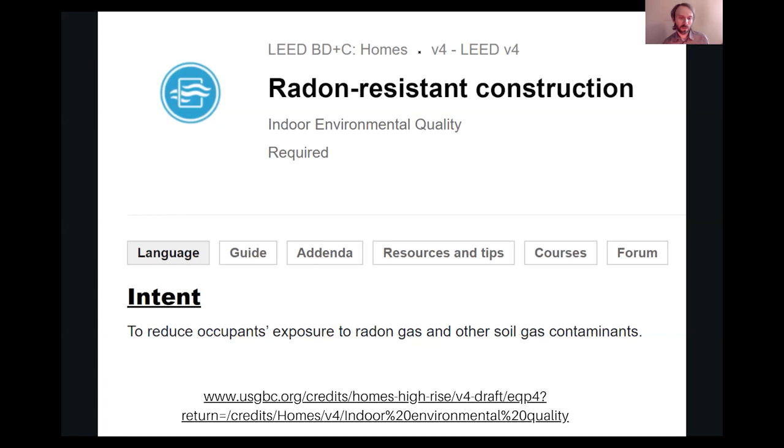Under the LEED for Homes certification program, the residential program, radon is addressed through radon-resistant construction practices. Typically this involves requirements for homes in EPA Radon Zone 1, but you can also get an extra credit if you do this in EPA Radon Zone 2.

So you're talking about capillary breaks, electrical outlets near the venting pipe for passive systems, and having the vertical vent pipe properly installed with the T-fitting in the aggregate layer below.

We're not going to be talking about that today. We have other sessions we've done, and you can check that out as far as how to do these strategies.

Canada also has some requirements here if you're doing a LEED project in Canada that you can take a look at as far as testing procedures.

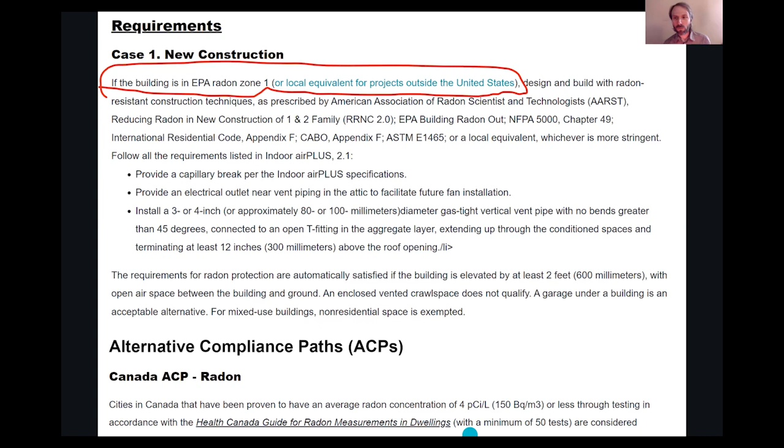Now, for those of you outside of the US, in countries with especially no radon practices, there's a couple different strategies you can take. First of all, the one that we recommend, and we recommend this in the US too, is just assume the worst. Assume a high-risk radon system, install the passive ventilation system, and encourage testing.

If you do not install the system, then we're talking about long-term tests or short-term tests. And again, today we're going to be talking about these long-term tests and the best way to do it, which have added benefits to your clients for radon, right?

Or you can demonstrate that the project is in a radon low zone by having government available data in those other countries. Now, if you're doing a LEED renovation project...

Again, if the building is in an EPA zone 1 with no slab work being done, then you need to test the building for radon. So again, we're going to be talking about that today. What is the best way to test? There's a good, better, best approach.

This is the best way to do it long-term, ensuring that anything changes is handled properly. Again, it's above and beyond the requirements for LEED, but it is something we are going to be highly recommending. This is what needs to be done when you're doing renovations.

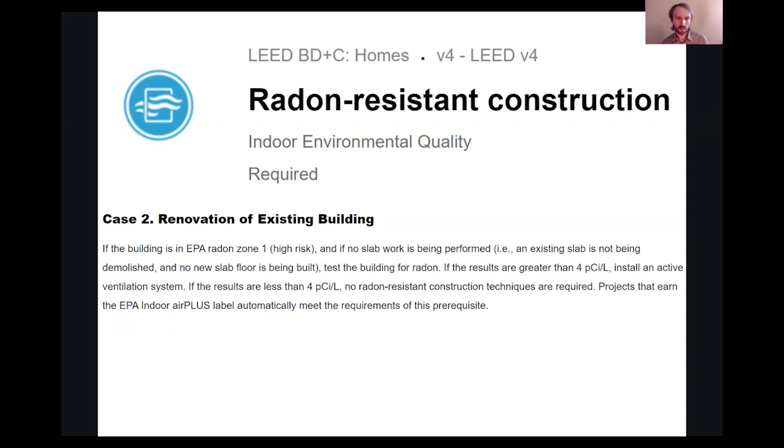Now, for the Green Star certification program, whether new or existing construction, if you're in an EPA radon zone, you do need to put in a mitigation strategy. But all homes, no matter what zone they're in, must do testing. We've been going around testing existing homes, even in radon zone 3s, that come back high off the charts. We saw someone's house come back at 25. Again, 4 is the level where you take action; other countries take action at 2. This person happened to be a nuclear submarine operator, so maybe it was radiating off them, but anyway, I don't know. We see these things come back at higher levels. So the Green Star program requires testing no matter what zone you're in, and there are alternative approaches at the gold level of Green Star requiring ongoing permanent testing, which is what we're going to be talking about today.

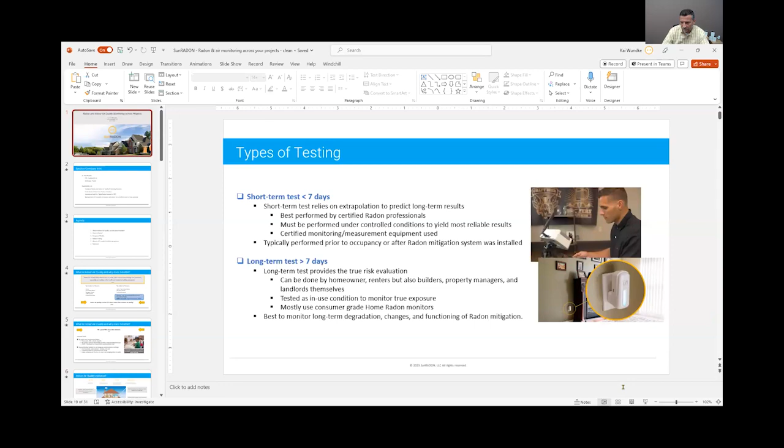As Brett said, the talk today is about radon and air monitoring across projects and what it means. As an introduction, my name is Kai Wundke, I'm the CEO of SunRADON, a Melbourne, Florida-based company, privately owned. We design, manufacture, and service radon and indoor air quality monitors for more than 30 years, since 1985. We serve professional radon testers, home inspectors, consumers, facility managers, property managers, landlords, you name it. We invented the first digital radon monitor in 1987, and since then we've been trying to improve our products and services. We've deployed tens of thousands of units still in the field monitoring, and every year we collect tens, if not hundreds of millions of hours of data which help us make decisions. This presentation is purely based on our experience, what we see and do from a manufacturing perspective to help improve indoor air quality.

Quick agenda for my talk: I know many of you are aware of what indoor air quality means, but I'd like to give a short introduction to bring it into perspective - why it matters and how radon plays into that. I'll repeat what radon actually is, since not everybody knows the dangers of radon, then go into testing strategies and examples of modern IoT-enabled monitoring systems for radon and indoor air quality, with a short summary at the end. If I talk too fast, please let me know. If you have questions, use the chat and ask Laura, and we can have a Q&A session at the end.

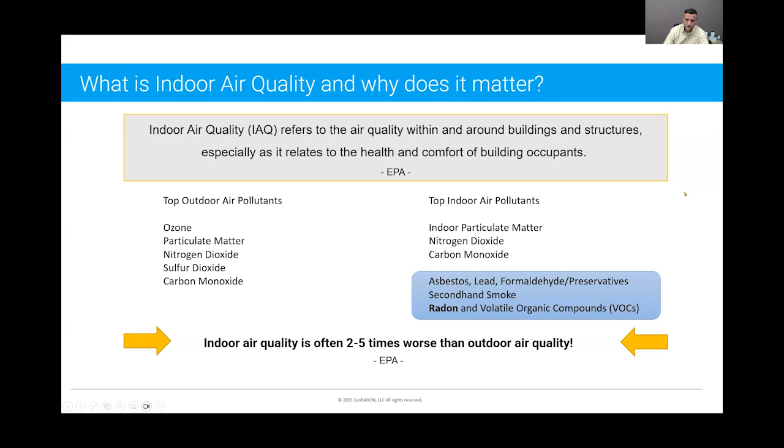Now, when we look at these trends, why indoor air becomes more and more of a concern, and also something to do about this, as time goes on we're spending actually more time indoors. There are a couple of reasons for that. Part of it, of course, we all live at home in our homes, our apartments, but most of our work is indoors. Our offices are indoors, schools, hospitals, education facilities. In many ways, for the most part of our life we're actually moving from one indoor facility to the next one and only spending very limited time outdoors. We all wish we would spend more time outdoors, but we don't.

Because of that, items like the sick building syndrome, probably something that wasn't really a name 10, 20, 30 years ago, becomes increasingly a major occupational hazard. So if you read EPA and CDC guidelines and updates, you find a lot about the sick building syndrome, which is not a particular disease or illness or pollutant, but it's the combination of all these indoor air pollutants which basically make the sick building syndrome.

Now, from our own experience over the last 3 years, we had our COVID-19 pandemic, and work from home policies changed how we work. We work from home much more than we work from our offices, actually. So it becomes more important as we go on that we spend more time indoors.

On the other end, GreenHome Institute and many good organizations around have a lot of good initiatives about improving our building standards. Now, what this really means in many areas is we try to save energy, try to have less pollution outdoors, but also less energy emanation from your house outside. And what this really does is, unfortunately, it prevents natural air exchange.

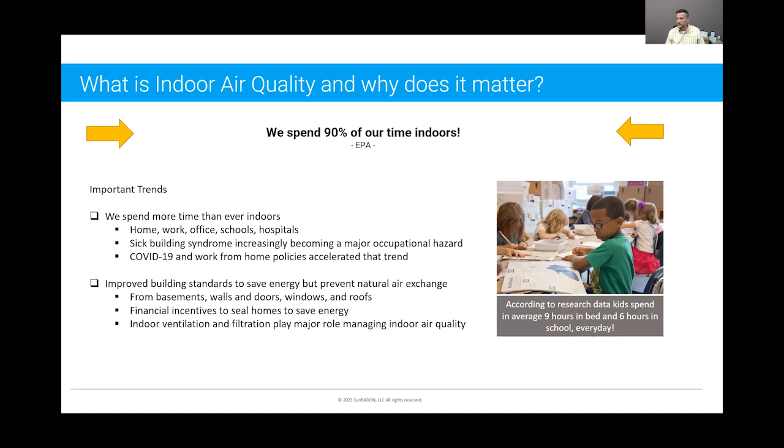And it causes a lot of health issues. It causes health issues for kids like pneumonia, but also cancer, as I will show later.

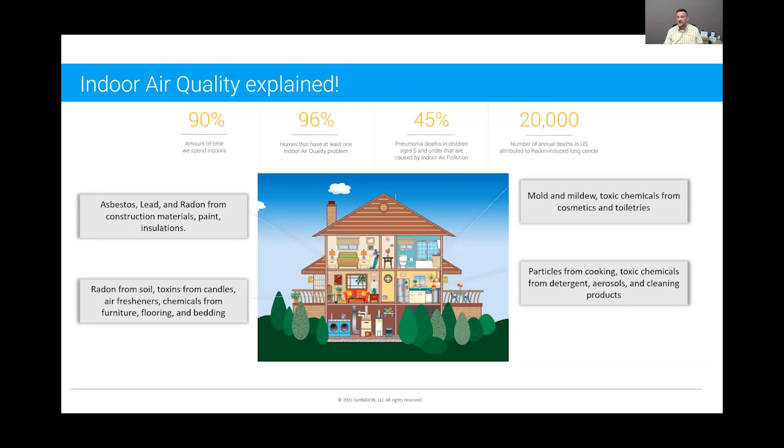So if you look at this really, if you're not careful, you have a lot of materials in the building, in the construction of your house, in the furniture, in what you use every day, in your utilities, in your utensils even, which could cause indoor air quality problems. And that's why it's so important.

Now, good versus bad indoor air, what does it really mean? Well, I talked a lot about you want to prevent illnesses and diseases, such as cancer or anything related to that, but something maybe less obvious: you just want to breathe better, you want to sleep better, you want to have fewer allergies, you want to have more energy. If your indoor air quality is good, these are the benefits, not just preventing diseases.

On the other side, if the indoor air quality is not good, you can start anything from general discomfort. You have a headache, you have dizziness, shortness of breath. The next level up is you get infections, you get skin reactions, you get some poisoning, nausea, vomiting. And the next higher level is then you develop severe diseases, damages to your liver or kidney, to the brain and central nervous system, and up to cancer. Or it can be fatal.

At the same time, the effect of indoor air quality is not just on your health, it's also in our society. If you look at your work, where you go every day, it affects productivity, it affects effectivity. Statistics show that there's higher work absenteeism if the indoor air quality is not controlled in manufacturing and office environments. It reduces cognitive ability, so people are just not functioning as well if indoor air quality is not good.

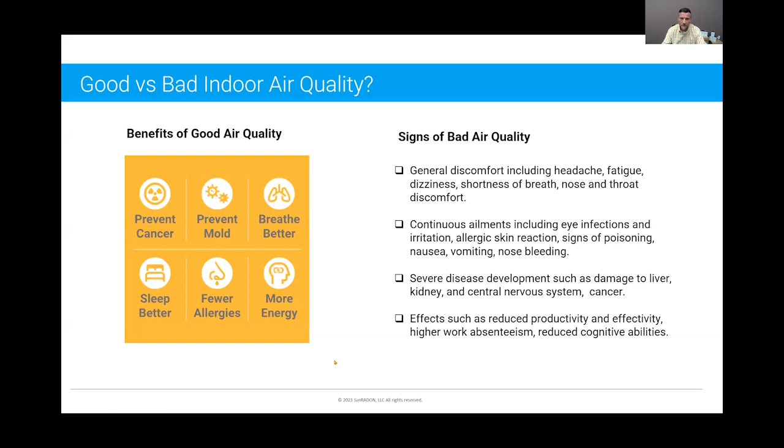Now, my last point about indoor air quality in general is also I want to talk a little bit about the misunderstanding. Why are we where we are, where not everybody is really very well aware of the danger of bad indoor air?

Number one is, typically when you talk about indoor air quality, you're talking about something that doesn't affect your life immediately. It doesn't kill you immediately like carbon monoxide or smoke. We have carbon monoxide detectors in our bedrooms. We have smoke detectors in our kitchens and living rooms. Yet we don't have any other air quality sensors, because it doesn't feel as urgent. There's some sort of complacency.

The next point is that, interesting enough, a lot of indoor air pollutants are actually not easily filtered by your HVAC system. You think you have a good HVAC system, you have a HEPA filter, some advanced filtering, two-stage, you name it. Yet all what your HVAC system actually does is distribute your indoor air pollutants across the entire building. So there's also this false sense of security or safety that you're good. Well, you might not be.

The next point is some of the air pollutants absolutely do not show any early warning signs or side effects. So just because you don't have a headache, you don't sneeze, or you're not kind of flapping around, doesn't mean you don't have a problem. Again, often false negatives give the false impression that there's no problem.

And at the end, it was also not easy to test for all the indoor air pollutants until recently. Just until recently, technology like MEMS, micro electromechanical systems, basically mini chips in one unit which can measure for VOCs, it was just not as easy and available and affordable to test for indoor air quality and indoor air pollutants. It required you to hire somebody very professional, somebody who can do a very specific test for you, a one-time test for a day or two, or whatever it is, gives you a report and you pay for it and you're good.

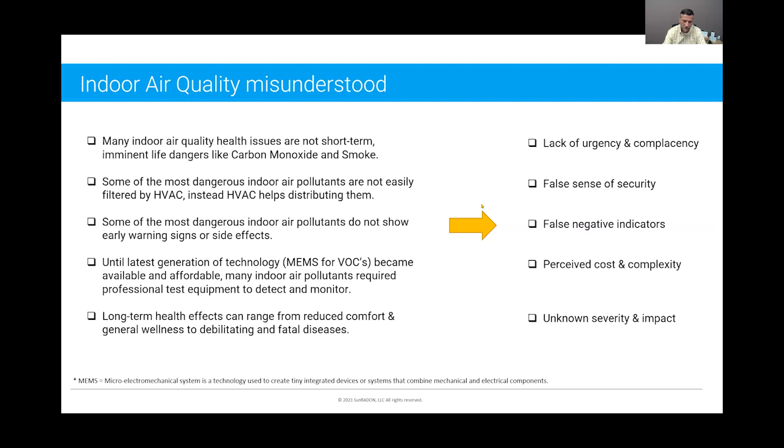Now let's go to radon. Why radon? Obviously, radon is one of the number one indoor air pollutants, and in our eyes, one of the most dangerous indoor air pollutants, and I will explain why. What it is and what it does, I will explain as I go into radon testing.

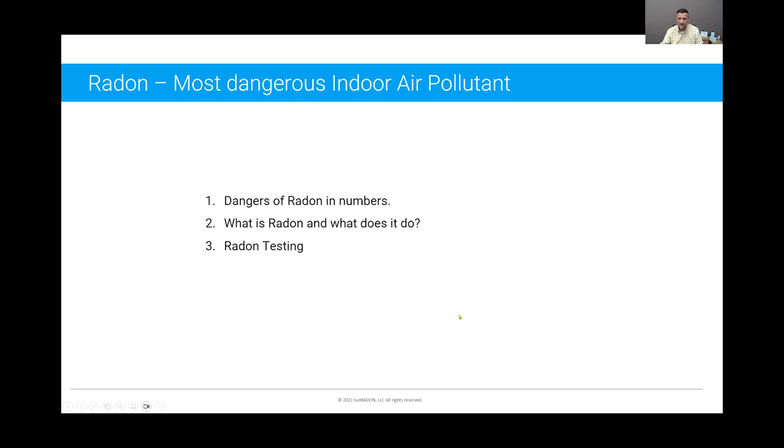Some statistics here you might have seen before: according to the EPA, data from about 10 years ago, so it should be updated, about more than 20,000 people every year die from radon-induced lung cancer. If you make this relative in numbers, it's actually more than drunk driving fatal accidents every year. It's more than all combined indoor home-related accidents and deaths, including fires, drowning, electrocution, falling from a ladder, you name it. Combine all this together, and it's still not the number of radon-induced lung cancer deaths every year in the United States. On the right side, you see some statistics on what the levels mean in terms of smoking.

Also, just to visualize it, about 1 in 15 homes in the United States have elevated levels of radon. So millions of homes, schools, and buildings are affected here.

I also want to make a brief comment on the EPA zones. Brett mentioned EPA zones 1, 2, 3 and requirements. I'd like to put a little bit of a warning out there: these EPA zones are based on maps which are more than 20 years old.

So we, as a manufacturer, are helping the CDC to basically update these maps. We're giving a lot of data to help look at this, but these EPA maps are, A, old, and B, they only talk about known exposure from soil. They don't talk about what can happen based on local infrastructure or construction materials, none of that. So just because you're in EPA zone 1, or not in zone 1, doesn't mean you can feel safe. There are also false conceptions there.

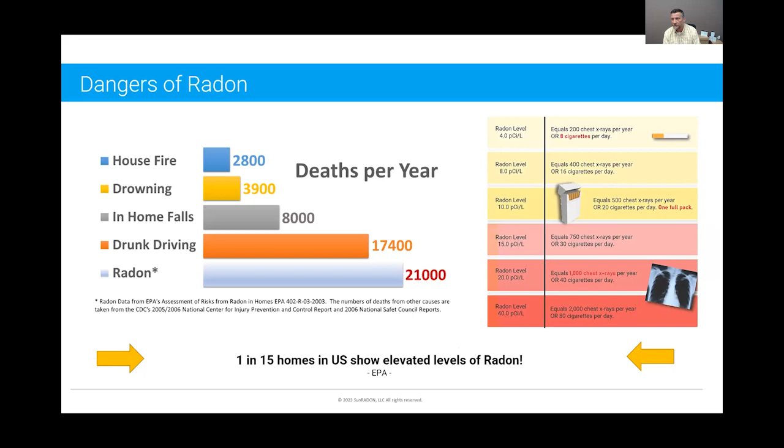Now, what is radon? Well, radon is a naturally occurring radioactive gas. Unfortunately, you cannot see it, you cannot smell it, and it exists everywhere - everywhere there's soil, everywhere there's rock formation. It exists to a different degree, but it exists everywhere.

On the outdoor level in the United States, on average everywhere, it's about 0.4 picocurie per liter. I'll try intentionally not to go into technical details of what this means, but as radon emanates from the soil around all of us every day outdoors, it is there. Everybody breathes it in, but at levels known below 0.5 picocurie per liter, studies show it has no long-term, measurable effect on your health.

Now, radon can originate from soil under your home, but it can also originate from water polluted with radon, or it can come from construction materials - many people forget that. Very simple: if you use sand which is radon-rich, which emanates a lot of radon, and you make concrete out of it, the concrete will emanate radon forever.

Also not very well known is that radon can actually diffuse through a lot of the vapor barriers on concrete material we think might prevent it from entering your home. It might slow it down, but it actually doesn't prevent it. Now, of course, if you have a steel wall, no radon comes through, and if you have a very dense concrete wall of 3 feet, nothing comes through. But often this is not the case.

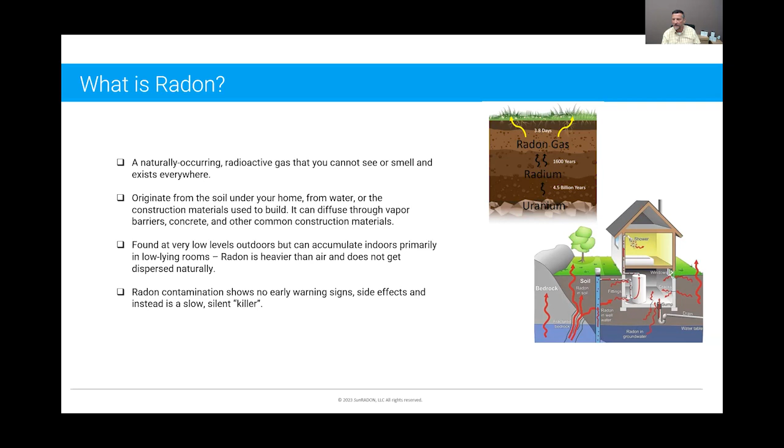Now, radon is actually one of the things where you won't have any warning signs. You won't have any side effects. You won't know that you're actually inhaling radon every day and that it damages your lungs.

And this is my last slide here. The dangers of radon is it gets into your home, as explained. You actually breathe it in, and what happens is you're breathing in the radon and it decays after you breathe it in. Once it decays, the alpha particle, which gets generated as part of this decay process, is actually what damages your lungs. And if you do that long enough, with a high enough concentration, it slowly but surely changes the DNA of your lung, it basically damages your lung irreversibly. And again, 21,000 - and this number probably is higher by now - but it's basically the data we have from the EPA.

Now, radon testing and monitoring. The core of this talk here is, what about the cost? And I have a quick one slide to that. And then type of testing, type of properties, long-term versus short-term testing, the question why is long-term testing important, and then some examples about long-term testing with home monitors.

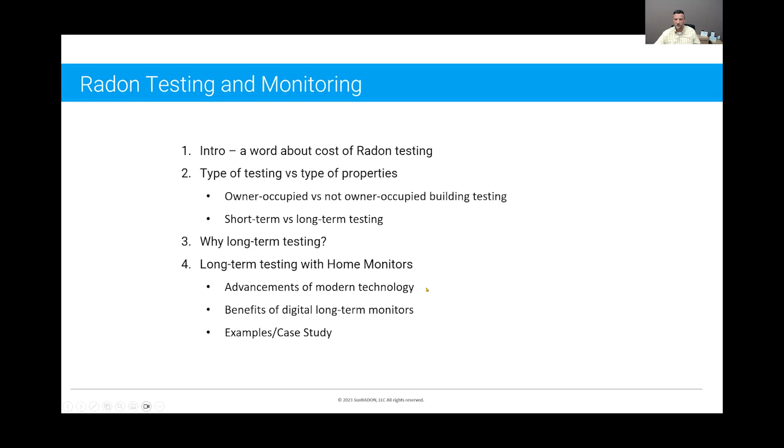Now, to the cost of radon testing. On average, a radon test costs you about $250. And when I say on average, that's about what a radon inspector will charge for one test point when you have a single family home with one foundation. It's about what you pay for a device you can buy by yourself and install. So it's an average, but it's not much more than that. Now, if you want to test multiple homes, multiple floors, it becomes more, but per test it's about $250.

But now, if you get sick, if you get cancer because of radon, well the first thing is you have out-of-pocket expense for the insurance. If you have good insurance, you might pay $4,000 a year. If you have less good insurance, you might pay $30,000 out-of-pocket expenses. But the real cost really is in the tens, hundreds of thousands of dollars every year for cancer treatment. When you look at radiation treatment, blood treatment, it goes up to almost $1 million a year per patient.

Now, I don't even want to try to put a number on what is the cost of life when somebody dies because of cancer, or family members missing someone, someone just dealing with cancer, with the treatment of cancer, with the interruption of life - even if you're a lucky one and you can get treated and completely recover. I don't know how to put a number on that, but it's huge, and you can make your own judgment. If you look at it from an economic standpoint, the economic impact on patients who get cancer every year - in 2019 the CDC estimated it was more than $21 billion. Radon is not just the second leading cause of lung cancer, right behind smoking, it's also well within the top 7 causes of cancer in general, any cancer.

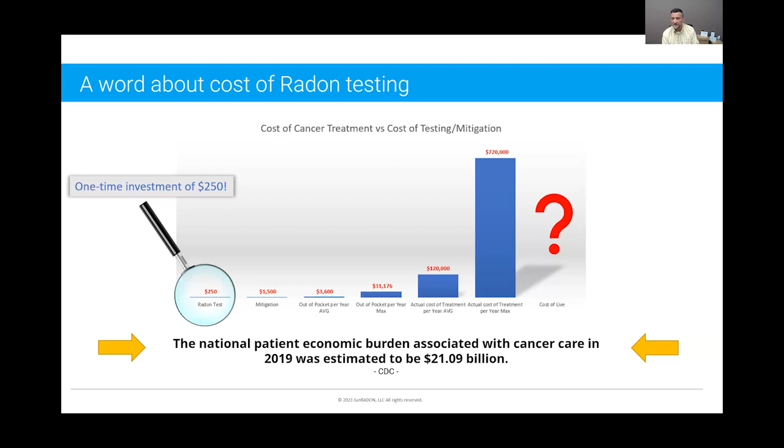Now testing - I came up with this slide myself. You won't find this in any publication, but I try to give a really high-level overview. When we talk about testing, what does it really mean, or what options do we have here? On the left side, you see this quadrant, 4 quadrants, and I try to distinguish between owner-occupied facilities and buildings, and not owner-occupied. What I mean by owner-occupied is all single-family homes, townhomes, owned apartments, condos, something like that - something where you purchase it and you live there. This is what we have in mind when we talk about radon testing. Most people have that in mind: I buy a house, an apartment, a condo where I live, and I want to test it.

However, there's a much larger number of structures available which are not owner-occupied, and we also need to think about it, because we spend time in there too - multifamily buildings, apartment buildings, rentals, office buildings, educational and retirement facilities, your high school, your university, hospitals, commercial, industrial, manufacturing buildings. People spend 8 hours on a manufacturing floor making products for companies like us. It's indoors. We have to be concerned about that.

Now, who are the responsible parties to make sure that these buildings and structures are safe for the occupants, for the people living there? On the not-owner-occupied side of buildings, there are landlords, property managers, facility managers, but then there are the occupants themselves, who are responsible for their own actions, for their own health.

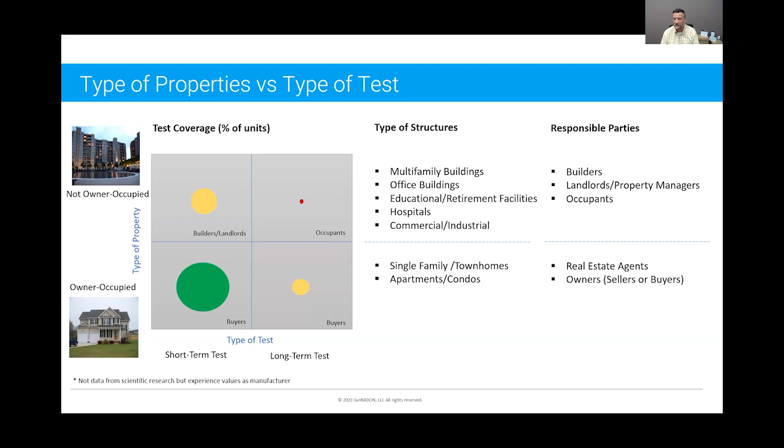Now, from our perspective—what we would like to see based on our experience and the impact on health and what can be done—this is how the map should look like.

There will always be short-term and long-term tests, because there's a practicality to that. In many situations, it's just not practical to test long-term for 30, 60, 90 days, or continuously, 24/7. So short-term testing—there will always be a need for that. And this should have the same need and the same coverage for not owner-occupied or owner-occupied. There shouldn't really be a difference.

But the long-term testing coverage should be—I wouldn't say 100%—but it should be as large as possible, because there's no valid reason not to test. The cost of it and how to do it, the affordability—we are at a day and time now where this is not an issue anymore. It should not be an issue anymore. Anybody can do it, and anybody who's concerned can afford it.

If you look at this, $250—you go out with your family of 4, probably two dinners in a restaurant. So skip 2 dinners out over 2 weeks, and you've saved your money for an indoor test.

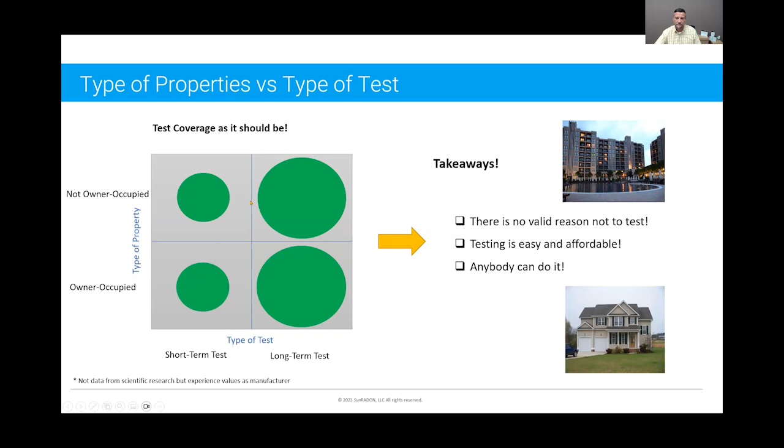Now, let's talk about owner-occupied testing first. Who's doing it? Well, for the most part, home inspectors, or home inspectors who are outsourcing and subcontracting radon testers—specific radon testers.

The majority of this testing is actually initiated during the real estate transaction. If somebody buys or sells a condo, apartment, or home, this basically gets initiated as part of the real estate transaction. Because of that, it's time sensitive—nobody wants to wait 30 days before they sign a contract and move into their house. There will be a contingency for radon testing, but then you make a short-term test, 2 days, 3 days maximum. You get your test results, and as a seller you might have to install a mitigation system if levels come up high, but this is what triggers it.

Now, as I mentioned before, as awareness goes up, there is some long-term testing performed by owners themselves—either hiring long-term testing or using long-term test kits, but for the most part electronic devices, indoor air quality monitors like ours, are being used more and more for long-term testing by homeowners. I think part of it is simply that radon awareness starts to help through social media, through the internet, through talks like this. And more people test.

There's this noble concern about occupants' health, always. But to be honest, for the most part, the motivation to test is often not the occupant's health, but liability and resale value.

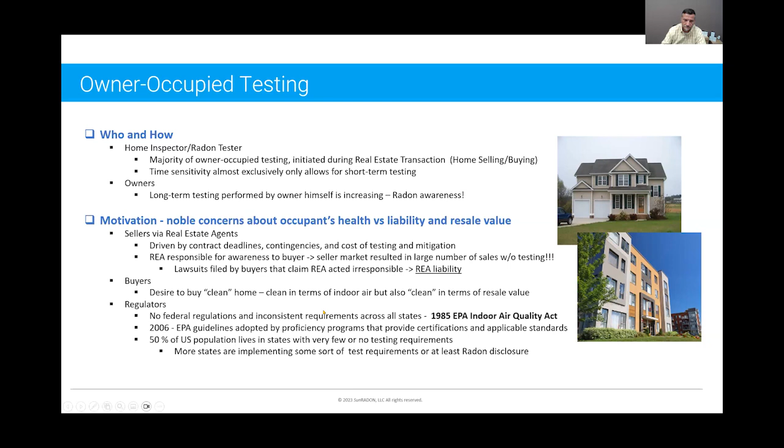Now, if you go to not-owner-occupied testing, who and how is typically initiated as part of construction, as part of recertification of the building, or renewal of occupancy certificates, things like that. If anything, when you have major reconstruction or new construction, this basically just comes up.

Again, it's time sensitive - not necessarily because during construction you wouldn't have enough time to do a long-term test of more than 7, 30, or 90 days, but because of lack of planning, lack of awareness. This testing tends to happen afterwards, where you want to make a check mark at the end of your construction project - you hire somebody for 2 days, get it over with, test it, and move on. That's why it's mostly short-term testing, not because it cannot be done. I need to say that testing large buildings requires planning.

You cannot just, like with a single family home where you might place one monitor, you need a careful plan where you place your devices, where you make your test points, how long you test, and how you analyze it based on environmental conditions, the ventilation in the building, and so on. So it's not that easy, but it's also not that complicated.

Again, we see a small uptick in long-term testing here, mostly by renters, not so much by occupants of commercial, professional, or industrial buildings. Mostly renters who basically rent a condo, apartment, or home and simply want to know, so they're installing some long-term testing.

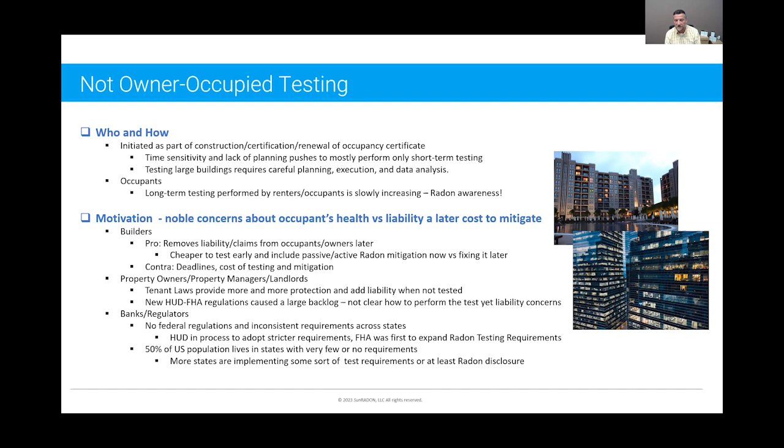Now, if you look at the banks and regulators—the banks who loan the money for the properties and the regulators—again, there's nothing consistent across all states. FHA adopted the first radon testing requirements, and they're working right now discussing expanding it. We just had a session where it goes to the next level, FHFA loans. And again, we're talking about 50% of the population where there's no regulation whatsoever.

Now, types of testing, short-term versus long-term testing. How am I doing on time, Brad? I'm okay here? Yeah, we're good, about 15 minutes. Thanks, all right.

Short-term versus long-term test: short-term test, I consider anything—it's not a hard definition, but practically—anything below 7 days. Basically something a professional can perform in a 2-day to 3-day test, typically 48 to 72 hours. And we need to recognize short-term tests rely on extrapolation to predict long-term results.

Because of that, it's best performed by a professional who knows how to do this test properly so you can extrapolate the long-term results. That's why it must be performed under very well-controlled conditions so these extrapolation models actually work. And they're using certified equipment, calibrated and certified by proficiency agencies to make sure the devices are giving proper results. Typically it's performed prior to occupancy, when occupancy changes, or when a radon mitigation system was installed or updated. That's why it's time sensitive.

Now, long-term testing, which really evaluates the true risk of radon exposure, can be done by anybody. It can be done by the homeowner, but also by professionals, builders, property managers, landlords. There's not much to it. More important to me is that a long-term test is performed in as-use conditions, not an artificial controlled condition used to predict short-term to long-term results. It's in an as-use condition, which is the most relevant - how we live, how we work. And here, more and more, we see consumer-grade home radon monitors being used for this testing. I'll talk about that in a second.

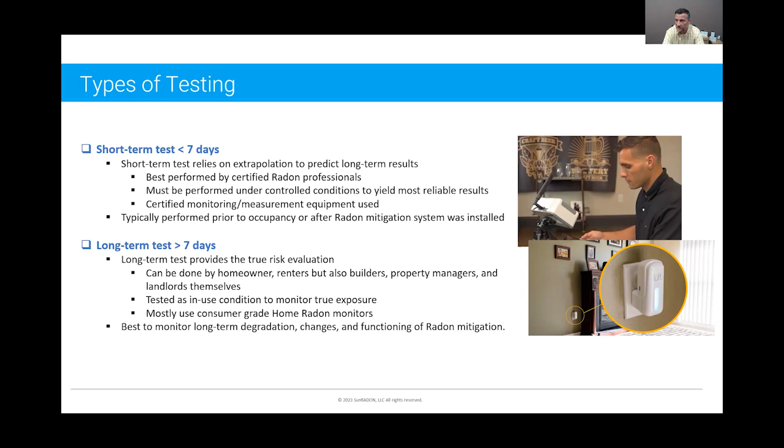Now, why long-term testing for radon? Just emphasizing the point - why is a short-term test not good enough or not sufficient? It's good as a screening, but it depends on the weather - weather and seasonal changes, rain, snow, wind. You can imagine if your entire neighborhood is covered with snow, the radon cannot escape. Snow is essentially an insulation blanket.

And the only way the radon can escape is through cracks in your home, so it accumulates much more. Similar for air pressure and rain - very similar. So it changes with the season. It also changes when you make intended changes to your construction, around your buildings, or even in your neighbor's buildings. Remodeling, updates, construction - it all changes the potential for radon to get into your structure, your building, your home.

Or you have unintended changes - settlement cracks, plastic diffusion barriers deteriorating, cracks, splits, failure of insulation and seals. All kinds of things you don't want to happen, but they do happen. And then we have system failures - mitigation systems are intentionally installed, but motors and fans don't last forever. Sometimes there's piping blockage - something as simple as a bird building a nest on your pipe and you don't notice. Or electrical failures. Similar ventilation systems, which are a surrogate for mitigation systems, sometimes have the same issues - motor, electrical, or blockage failures.

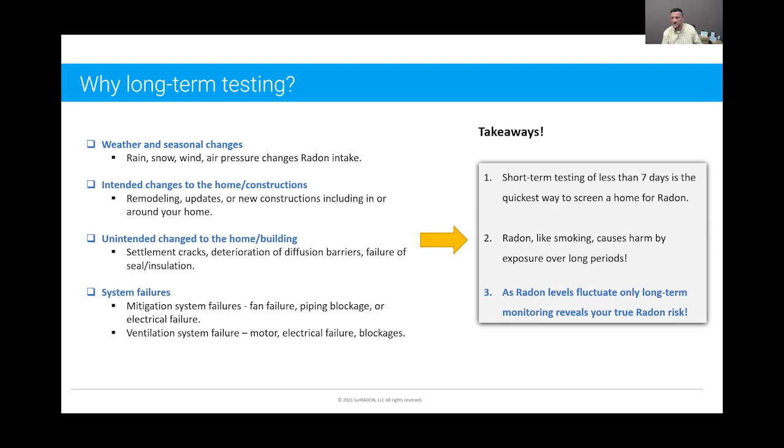So in short, short-term testing is the fastest and easiest way to get a quick screening. But radon is a long-term problem - it's a problem in lived-in conditions, and only long-term testing can really evaluate your true radon risk.

Now, talking about how to test for radon long-term - the good thing is technology advances quickly. And it's not just us, SunRADON - there are also suppliers and vendors out there, very good companies making very good products. The days of charcoal canisters, I would say, can be over, should be over. And there's a reason for that.

The charcoal test kit, pictured here, is typically a small canister. You rip the label off, put it in the environment you want to test, leave it there for the intended duration, then send it to a lab. It costs about $25 per test. But if you want a long-term test, you either have to repeat the test many times or buy special test kits, and you get one number at the end. If you ask a professional to do the test, it's about $250 per test point.

Or you buy a smart home monitor, which can cost anywhere from $150 to $300 on average - let's say $250 per device. As for ease of use, with charcoal test kits you have to manage them yourself - take the label off, send them to the lab, and they send you a result back. Smart home monitors, in today's age where you have lots of smart appliances and devices in your home, controlling your light bulbs with your phone - it's nothing different. You plug it in, turn it on, connect it to your mobile phone, and you're done.

Right? It's something we do every day now, which becomes just our standard procedure of how we operate.

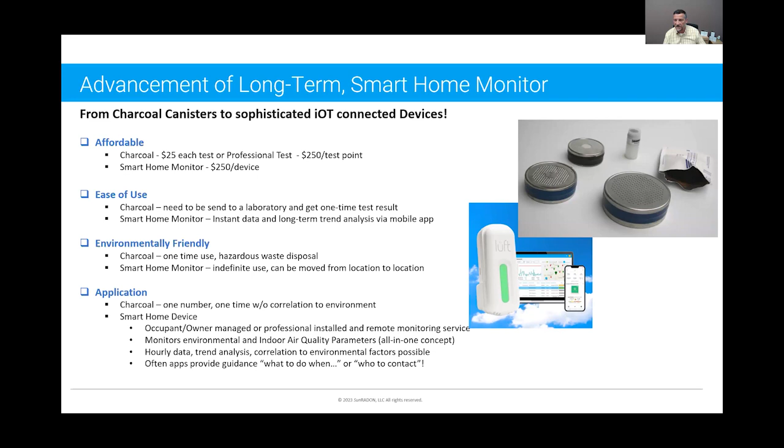If you have a spike, you can correlate what actually happened, let's say to a fan failure or motor failure. And mobile apps, more and more now out in the field, help you know what to do when you get high levels, who to contact, what's the next step. Now it guides you along the way.

And what are the benefits? It's obvious. It's a true long-term test under in-use conditions. And the good thing is, because it's a continuous long-term test, it can detect sudden failures of systems, like mitigation system failure, but it can also detect very slow deterioration of your conditions.

It's flexible, anybody can do it. It's accessible and connected. Most of them now have Bluetooth or Wi-Fi or both. You have real-time access over Wi-Fi through the cloud and a mobile app. You often have web-based dashboards for remote services, for facility managers and property managers, and it gives you more than just radon—it gives you mold risk assessment, VOCs, CO2, outdoor air quality index, all these parameters you worry about, all in one.

And it's virtually maintenance free. Once you plug it in, there's nothing to do. You plug it in, you connect it, you're done.

Now, again, I want to emphasize the home radon monitors are not intended to replace professional short-term testing. There's always a place for that when time constraints are there, when conditions don't allow testing for 90 days. However, they provide a really cost-effective, reliable, long-term solution for air quality assessment, and it's flexible—you can install them and use them as you need them.

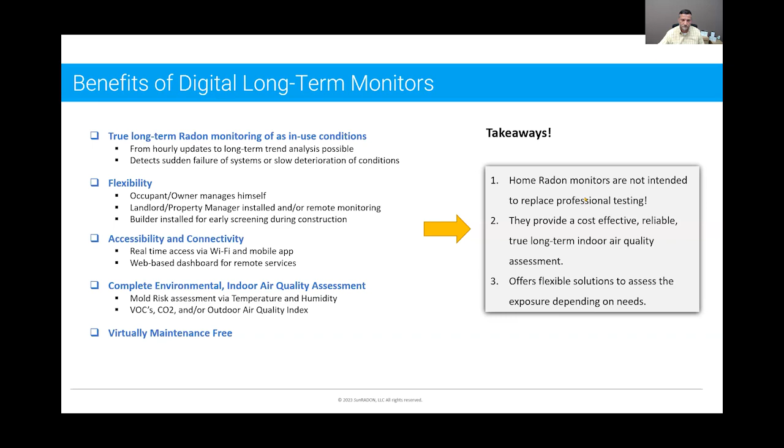Now, anybody can do that, and technically you can have many monitors displayed or managed through your mobile app, but this becomes cumbersome as time goes on. If you have 100 monitors on your mobile phone as a facility manager, you don't want to manage your business through your phone. So what modern systems now have is a backend where the same data are accessible by service providers as an optional feature.

Again, this is more intended for property facility managers, landlords, or radon mitigation companies who install a radon mitigation system and want to know if it actually works and provide a service guarantee, or general indoor air quality service providers.

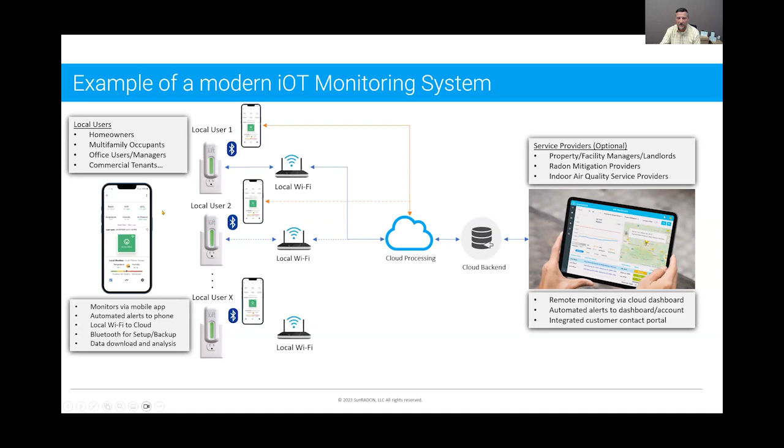You can imagine if you have facilities, apartment buildings, or manufacturing facilities with tens or hundreds of these monitors, it becomes almost impractical to monitor locally. So you have the remote monitoring option now.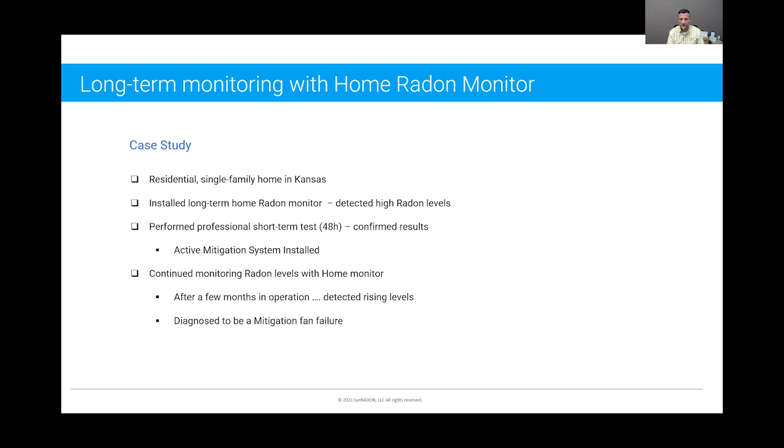The tests were confirmed, and an active mitigation system was installed. Everything was good. However, he also kept the home monitor plugged in, connected, and remotely monitored. After a few months in operation, levels started rising quickly all of a sudden. And sure enough, when the mitigation company went back and looked at it, there was a fan failure. Here's some data on that.

So how did it look? It's a typical basement here with a sump pump, but the monitor is actually plugged back in here. You see it's just connected to a power outlet and connected to Wi-Fi. And this is how it looked before they mitigated. It wasn't super high, but certainly high enough to be very concerned about.

Remember, the EPA guideline is 4. This one was about 18, 19. Interesting enough, it also varies by about a factor of 2 over this timeline. Each data point here is a 48-hour average, and you see how this average goes up and down. So if you do just a short-term test, you might end up down here, or you might end up here. But both cases show elevated levels of radon.

But as a mitigation company, you might design your system differently based on what you test, whether you test down here or up here. So it influences the design of the mitigation system.

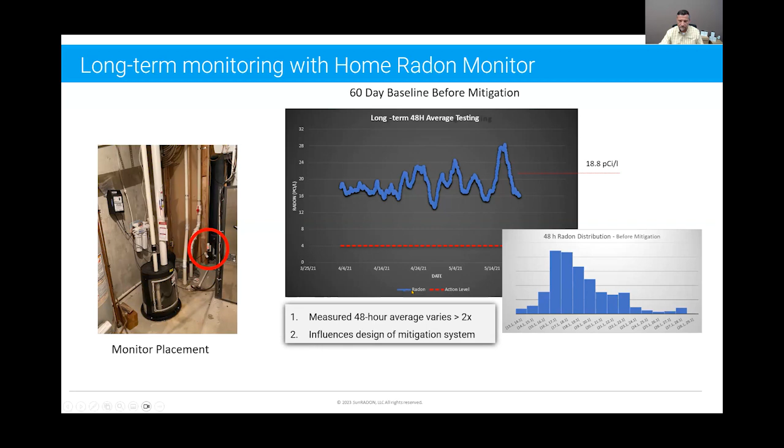Now, once this customer installed the mitigation system, very quickly, within basically 2 days, the levels drop below 1 picocurie per liter and stay there. You can basically immediately measure with your home monitor and manage through your mobile phone, or the mitigation company can remotely. So I can actually see in real time if the mitigation system works or not, and if it doesn't, something you can do about it.

Now you see the mitigation system turned on and how it immediately goes down. It's just a different scale of the same chart. And here you see how the system actually looked outdoors. It's a fan installed with pipes, sucking up the radon from the lower level and exhausting it above the roof line.

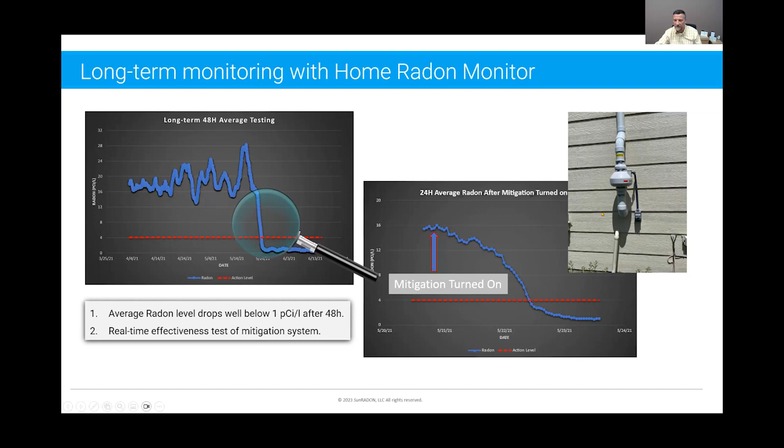Now, what happened is a couple of months later, while we were automated monitoring via our remote cloud dashboard, the levels went up. We set the levels to 2 picocurie per liter as a warning level, to do something before it goes above 4. And we received a warning within 24 hours of the failure. When the investigation happened, it turned out to be a fan failure.

Basically this fan turned off. Now, you see again, immediately, it's just blown up at a different scale here. The moment the fan failure happens, you can see how it immediately rises and goes over the level. And you can set an alarm, we set it with the yellow line, not waiting for the red line, as many people might not. You can do something about it without ever having to go back to the site. The system is set up so it actually averages over a 24, 48-hour period.

What this helps with is if you have a short-term increase, a short-term spike. It can happen for many reasons. Like in Florida, we never have radon in our homes, technically, but when a hurricane comes through with pressure changes, we can see our radon levels come up for a day or two. Similar here, when you have snow or rain, you can distinguish short-term effects, which you're not worried about for your long-term health, from long-term effects.

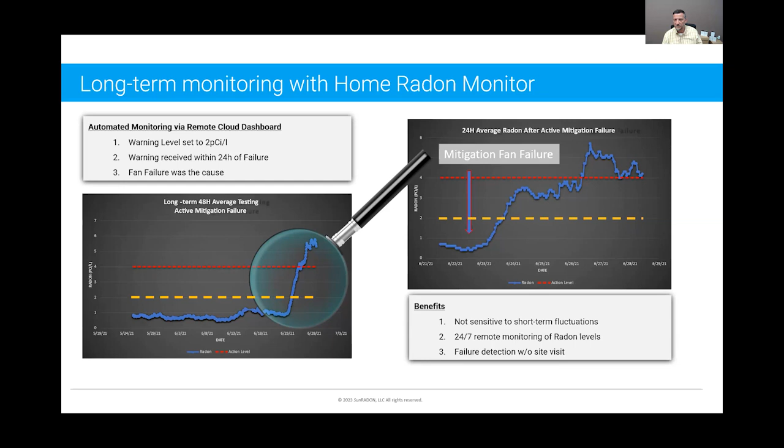Modern IoT-enabled home radon monitors don't require any of that. So, in my last slide here are some other examples of testing with long-term IAQ monitors. We call them IAQ monitors because some measure more than radon.

There was a home in Florida. Florida is known for very low radon levels, and the reason for that is very sandy soil. It accumulates, it can basically emanate from anywhere in the soil and escape, so it doesn't accumulate as much in homes, but it can when you have the right soil. It also can, as it turned out, when you build your house with a concrete slab which uses sand from, like you in Florida, you're from Tampa. There's a big sand pit in Tampa known for very high radon content in the sand. It's called francolite. So this is what happened here.

I was very surprised. The owner actually ended up selling the house. Or we had a customer with a vacation rental. He installed it in a vacation system where he's not always there. Also, clients are not always there, and clients don't want to, when they go 2 or 3 weeks on a vacation rental, monitor for radon. So he does remote monitoring with his mobile app, and sure enough, he found radon levels. He got actually not a radon alarm, but a power line failure alarm. The system is plugged into a power line, and if the power goes out, after a couple of hours you can set your alarm to get notified that the power's out and that you have to do something about it. Sure enough, the power was down for the radon fan, and before anything could happen, he went back, I think at the time with the rental, and turned it back on. Simple thing, simple fix to a potential big problem.

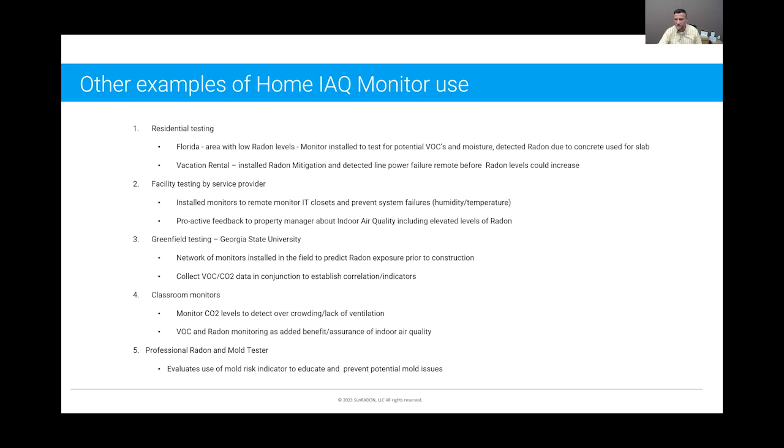So that brings me to my summary. I hope I've shown you in the last 45 minutes that indoor air quality is important. Poor indoor air quality is a widespread problem, more than 90%, 9 out of 10 homes are affected. Radon, in our opinion, is one of the most dangerous pollutants because you cannot detect it without a special detector. It has no side effects until it's too late, and it causes deaths.

An estimated 21,000 deaths. But it's easy to test, it's easy to test. There's a need for professional short-term testing, I don't want to take that away. But it's also easy to test with long-term consumer products, which are now available at a very small price compared to the cost of radon-induced lung cancer and managing that illness.

Indoor air quality and radon awareness is increasing. You're seeing more people using long-term monitors, which is good, and we want to help with that. That's why we are here today. Progress is being made, but there's also a lot more to be done. Think about people who can't afford it, $250 is expensive, so they have to find that money. We have to help them.

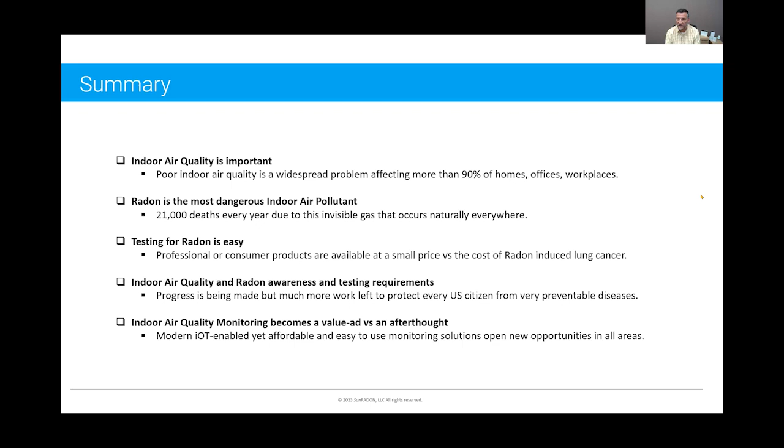An indoor air quality monitor becomes a value add versus an afterthought. It's not just something you think about after the fact, maybe I should do that. It's something which adds to the value of your building, the value of your property, the value of your life. And that's my summary: the only way to know if you have healthy indoor air conditions is to test it, to monitor it, and the cost of monitoring is insignificant compared to the benefits.